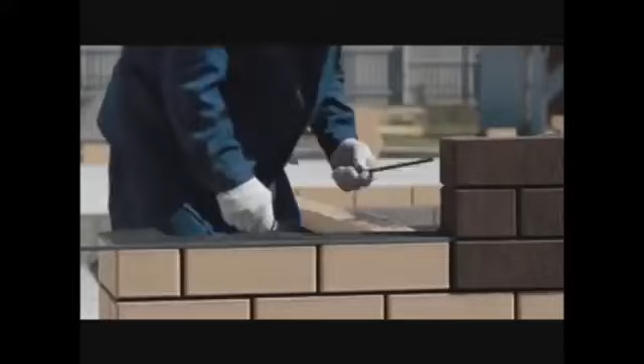In this presentation, we're going to be discussing the history of OSHA as well as the history of workplace accidents. We'll also be discussing the benefits of implementing an appropriate safety program. We'll go through the painful statistics involved in the construction industry and the most cited violations by OSHA inspectors. So, without further ado, let's get started.

In response to dangerous working conditions across the nation, and as a culmination of decades of reform, the bipartisan Williams-Steiger Occupational Safety and Health Act of 1970 was signed into law by President Richard M. Nixon. This law led to multiple organizations, including, of course, OSHA, but it also established the National Institute of Occupational Safety and Health, or NIOSH, and the Independent Occupational Safety and Health Review Commission.

The Occupational Safety and Health Act of 1970 was passed to prevent workers from being killed and seriously injured in the workplace. The law requires employers to provide their employees with working conditions that are free of hazards and known dangers.

OSHA establishes and enforces protective workplace safety and health standards. It was officially enacted on April 28, 1971. OSHA also provides information, training, and assistance to workers and employers. Workers may file a complaint to have OSHA inspect their workplace if they believe their employer is not following OSHA standards, or that they believe their workplace contains serious hazardous conditions.

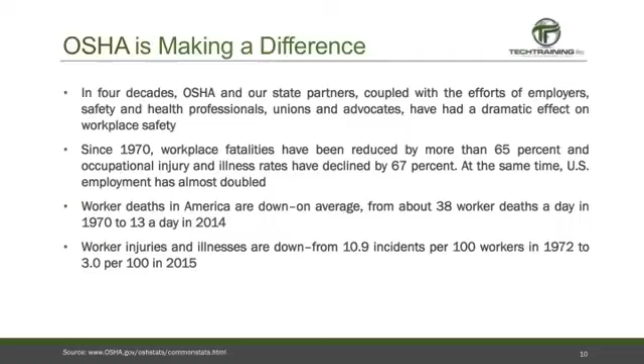Worker deaths in America are down on average from about 38 workers per day in 1970 to 13 per day in the year 2014, and worker injury and illness rates are down from 10.9 incidents per 100 workers in 1972 to 3 per 100 in the year 2015. These numbers are positive, but they're nothing to brag about. One death, one injury, one illness is far too many.

So who is covered by OSHA? Most employees in the United States come under OSHA's jurisdiction. OSHA covers private sector employees and employees in all 50 states and the District of Columbia, and other U.S. jurisdiction territories, directly through the federal OSHA program or through an OSHA-approved state program. State-run health and safety programs must be at least as effective as the federal OSHA program to qualify.

Employees who work for state and local governments are not covered by federal OSHA, but do have Occupational Safety and Health Act protection if they work in a state that has an OSHA-approved state program. Four additional states and one U.S. territory have OSHA-approved programs that cover public sector employees only. This includes Connecticut, Illinois, New Jersey, New York, and the Virgin Islands. Private sector workers in these 4 states and the Virgin Islands are covered by federal OSHA.

Federal agencies must have a safety and health program that meets the same standards as private employers. Although OSHA does not fine federal agencies, it does monitor federal agencies and responds to workers' complaints. The United States Postal Service is covered by OSHA. And now is a good time to mention the General Duty Clause. The General Duty Clause is written into the Occupational Safety and Health Act.

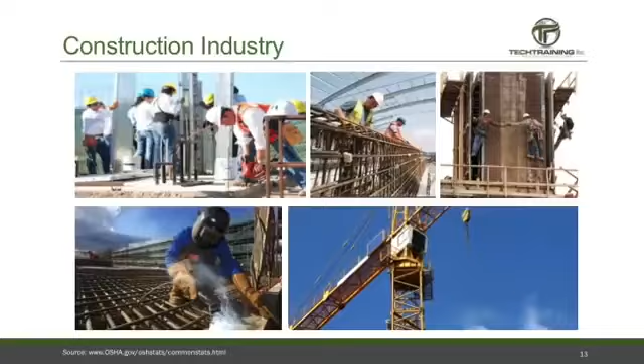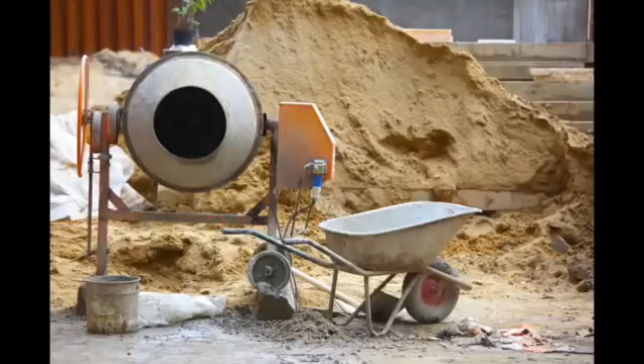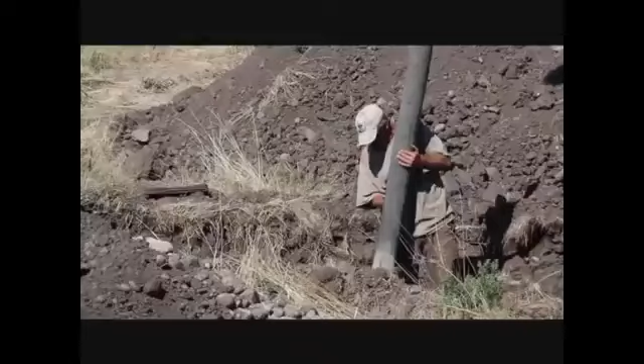And now, with this background, let's move on and talk specifically about the construction industry. Construction is a high-hazard industry that comprises a wide range of activities. It may involve demolition, alterations, renovations, and repair. Most people in this industry are in it because they have a passion for it. They're professionals and understand the hazards they face every day. Many of those hazards they can see - the potential for falls, unguarded equipment, or being struck by heavy construction equipment. Unfortunately, many hazards are not visible, such as silica dust or asbestos. The information and resources provided in this presentation are hopefully going to assist those in this industry, whether workers or employers, to identify, reduce, and hopefully eliminate construction-related hazards.

And there is no better place to start than with the construction industry's Fatal Four. Of the 4,386 worker fatalities in private industry in calendar year 2014, 899, or 20.5%, were in construction. The Fatal Four were responsible for more than half, or 60.6%, of construction worker deaths in calendar year 2014. And number one on the Fatal Four list, falls.

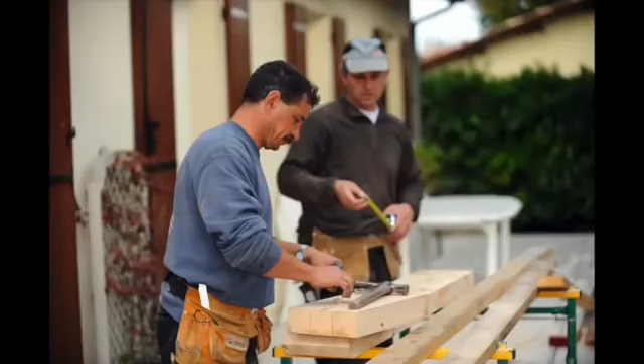359 of the 899 total deaths in construction in 2014 were caused by falls. That's 359 of our fellow workers who perished from this one hazard. Next up, electrocutions - 74 people killed. After that, struck by an object, 73 people. And last, caught in between, 39 fellow workers killed by this hazard. Just imagine if we could eliminate these 4 accidents - that would be 545 people returning home to their families at the end of every day, every year.

So now let's review what OSHA has found to be 2015's top 10 most frequently cited violations. Not surprisingly, number 1 is fall protection, obviously directly related to the Fatal Four. The C at the end of fall protection represents that this is a specific construction standard. Number 2, hazard communication - getting the message out. A big problem on the construction site and in the construction industry.

Number 3, also a construction standard, scaffolding. Number 4, respiratory protection - this is especially important when we're talking about silica dust. Respiratory protection protects you from unseen hazards. Number 5, lockout, tagout. Number 6, powered industrial trucks, obviously associated with being struck by, another one of the Fatal Four. Number 7, ladders, a construction standard. Number 8, electrical wiring. Number 9, machine guarding. And number 10, electrical - here we're talking about general electrical requirements.

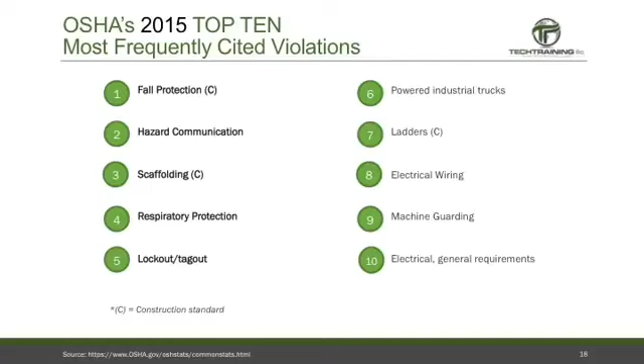Now we've already discussed that OSHA is the law, but let's take a look at the breakdown of these violations. Let's start with number 10, electrical, general requirements. This is OSHA standard 1910.303. Total violations for fiscal year 2015 was 2,181. Some of the top sections cited were installation and use of equipment, and, not surprisingly, the space around electrical equipment. This can be identified as a hazard on almost any job site you visit. The previous year, fiscal year 2014, the ranking for this violation was also number 10, with 2,427 cited violations.

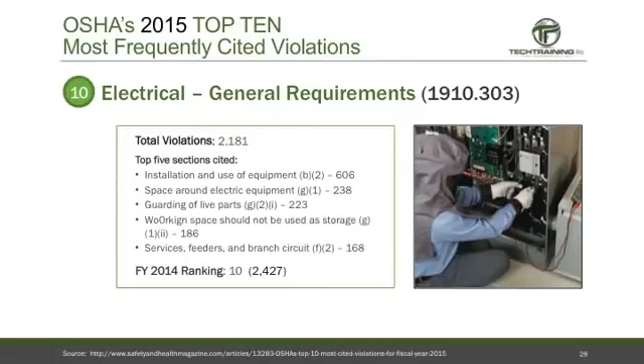Next up, number 9, machine guarding, OSHA standard 1910.212. Total violations for 2015 was 2,540. Not surprisingly, one of the top violations was types of guarding. It is highly recommended that you stick with manufacturer recommended guarding. If you question that guarding, you can always ask the manufacturer if this guarding is OSHA approved. If it is, then stick with that guarding and you can avoid this violation. This is the same ranking as 2014, number 9, with slightly more violations in 2015 than 2014, as 2014 had 2,520 violations.

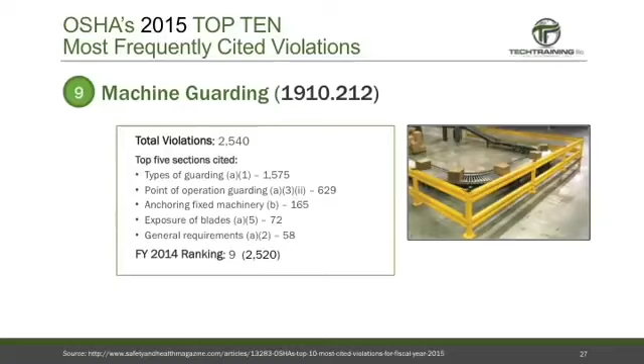Number 8, electrical again - this is wiring methods, 1910.305. Total violations for the year 2015 was 2,624. Of the top cited violations, use of flexible cords and cables - this is category G1 4A - had 447 violations. This one is becoming more and more common as people are using incorrect types of cords and cables. Be sure to verify that you're using the correct cable. In fiscal year 2014, its ranking was also number 8, but it had 2,907 violations, so 2015 saw a decrease of almost 300 violations, an overall improvement in the year 2015.

Number 7, ladders. OSHA standard 1926.1053. Total violations for 2015, 2,732. The number 1 cited violation in this category is requirements for accessing upper landing surfaces. This is a short climb, and what people do is grab a pallet or a plank and use it as their ladder. This was cited 1,866 times. The 2014 ranking for this category was number 7, so no change, but again a slight decrease - in 2014 there were 2,967 violations, compared to 2,732 in 2015.

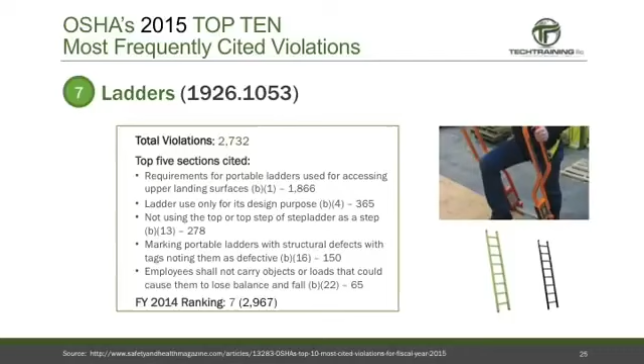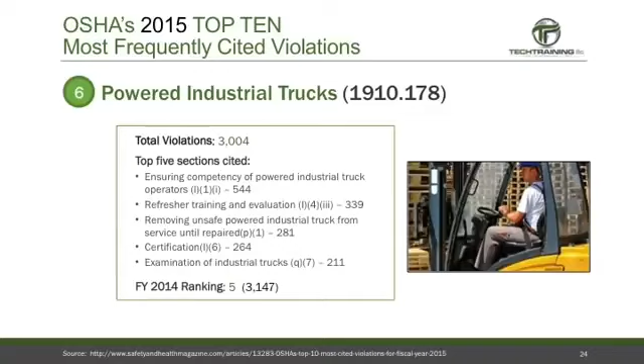Number 6, powered industrial trucks, 1910.178. Total violations, 3,004. Over 3,000 violations, and the number 1 violation is ensuring competency of the powered industrial truck operator. One of the fatal 4 was struck-by, and this violation was cited 544 times - incompetent powered industrial truck operators cited in 2015. That's a scary number considering the fatal 4. The 2014 ranking was number 5, so it's dropped back a bit, a positive sign, and the number of violations dropped from 3,147 in 2014. But these are directly related to the fatal 4 and have to be corrected.

Next, lockout tagout, 1910.147. This was number 5 on the 2015 list. This standard outlines minimum performance requirements for the control of hazardous energy during servicing and maintenance of machines and equipment. Total violations for 2015, 3,308. This is an increase from 2014, where there were 3,117 violations. Furthermore, this violation has moved up in the rankings - number 6 in 2014, moving in the wrong direction to number 5 for 2015. Next is number 4, respiratory protection, standard 1910.134.

This standard directs employers on how to establish and maintain a respiratory protection program. It lists requirements for program administration, worksite specific procedures, respirator selection, employee training, fit testing, medical evaluation, and respirator use. It also covers maintenance and repair of respirators. OSHA cited this standard in 2015 3,626 times. This again is a slight improvement over 2014, where it was cited 3,843 times.

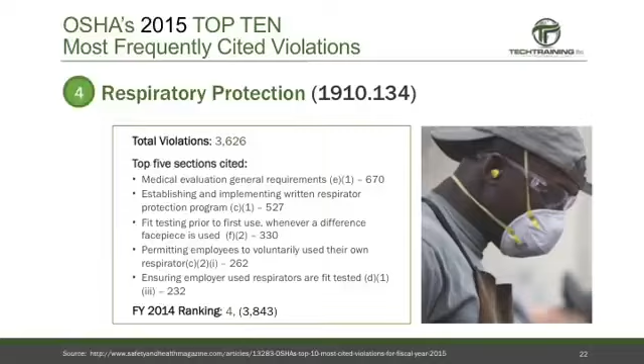Number 3, scaffolding, standard 1926.451. Total violations in 2015, 4,681. Take a look at the number 1 issue in this sector - it was employee fall protection, cited the most times at 788. And again, I want to remind you the number 1 in the fatal 4 was in fact falls. This is a slight improvement over 2014, where the ranking still remained number 3, but was cited 4,968 times.

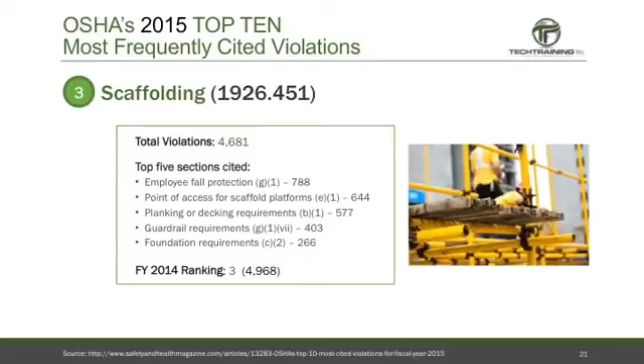Number 2 is hazard communications, 1910.1200. This standard addresses chemical hazards produced in the workplace and imported into the workplace. It also governs the communication of those hazards to workers. This particular violation was cited 5,681 times in 2015. Its ranking in 2014 was number 2, when it was cited 6,148 times - again a slight improvement over 2014.

And number one cited in 2015 again was Fall Protection, 1926.501. This is also the number one in the Fatal 4, falls. This standard outlines when fall protection is required, which systems are appropriate for given situations. It also covers the proper construction and installation of the safety systems, and the proper supervision of employees to prevent falls. It is designed to protect employees on walking or working surfaces, horizontal or vertical, with an unprotected side or edge higher than just 6 feet.

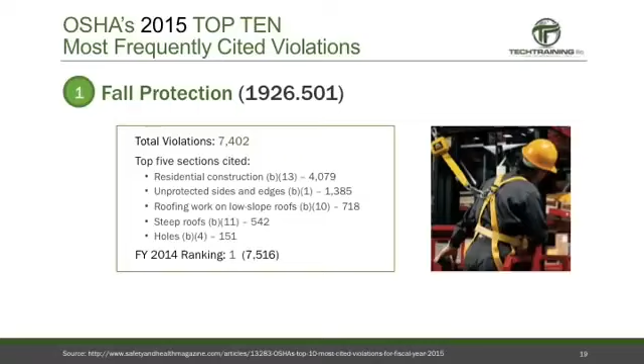According to OSHA's top 10 most frequently cited violations of 2015, this was number one, ranking fall protection, cited 7,402 times, and unfortunately it was also number one in 2014, being cited 7,516 times.

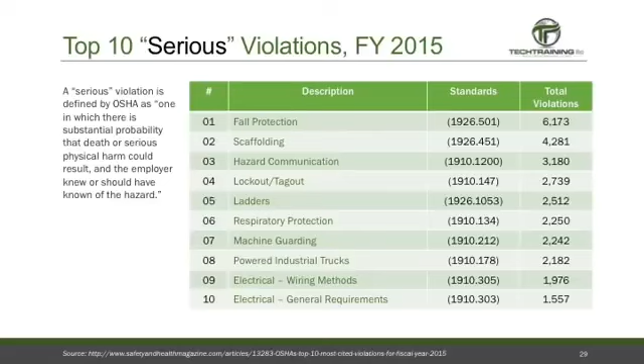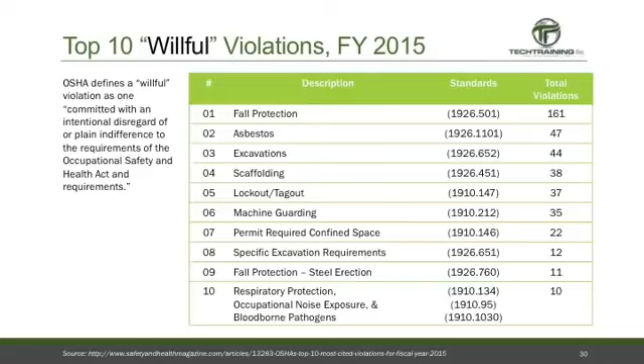Now, to show that these were not simply minor incidents, check out these statistics. Here is a list of what was considered a serious violation of the top 10. A serious violation is defined by OSHA as one in which there is an imminent substantial probability that death or serious physical harm could result, and the employer knew or should have known of that hazard. If you take a look, number one again is obviously falls, and 6,173 of those violations were considered serious. And check out these numbers - these are willful violations. Willful violations are those committed with an intentional disregard or plain indifference to the requirements of the OSHA standards and requirements.

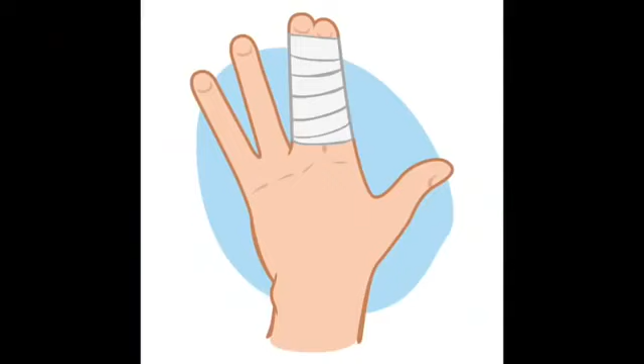Now here's a sad reality. Hazards exist on every construction site in many different forms: sharp edges, falling objects, flying sparks, chemicals, noise, and a host of other potentially dangerous situations.

OSHA requires that employers protect their employees from workplace hazards that can cause injury. Controlling a hazard at its source is the best way to protect employees. Depending upon the situation and workplace conditions, OSHA recommends the use of engineering or work practice controls to manage or eliminate hazards to the greatest extent possible.

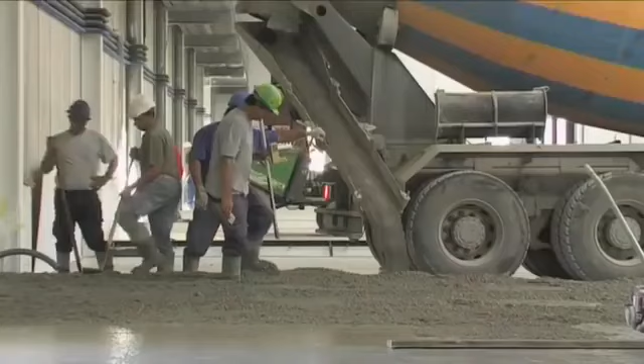For example, building a barrier between the hazard and the employee is an engineering control. Changing the way employees perform their work is a work practice control. When engineering, work practice, and administrative controls are not feasible or do not provide sufficient protection, employers must provide employees with personal protective equipment, or PPE.

Personal protective equipment is equipment worn to minimize exposure to a variety of hazards. These injuries and illnesses may result from coming in contact with chemicals, biologics, physical, electrical, mechanical, or other workplace hazards. PPE may include items such as gloves, safety glasses, safety shoes, earplugs or earmuffs, hard hats, respirators, coveralls, vests, and in some cases, full body suits.

So what can be done to help ensure the proper use of personal protective equipment? Well, all PPE should be of safe design and construction, and should be maintained in a clean and reliable fashion. It should fit well and be comfortable to wear. This will encourage workers to use it. If PPE does not fit properly, it can make the difference between being safely covered or dangerously exposed.

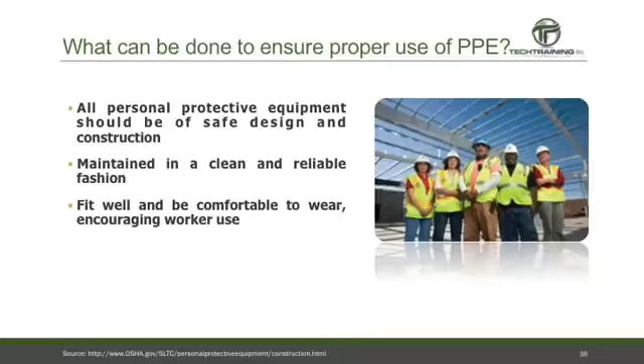When is it necessary to wear personal protective equipment? What kind of PPE is required? The limitations of the PPE, the proper care, maintenance, and the useful life, as well as the disposal of the personal protective equipment.

Now, whether you are an employee or an employer, you should be interested in some of the general safety and health provisions involved with personal protective equipment. This falls under 1926.28. The employer is responsible for requiring the wearing of all appropriate PPE in operations where there is exposure to hazardous conditions.

1926.28(b): Regulations governing the use, selection, and maintenance of personal protective equipment and life-saving equipment are described under Subpart E of this section. 1926.95(a): Protective equipment, including PPE for eyes, face, head, extremities, etc., shall be provided, used, and maintained in a sanitary and reliable condition.

Now, we realize some of these regulations are extremely dull, but this next one is important, as we've seen many arguments erupt between workers and supervisors on various construction sites. It's related to employee-owned personal protective equipment, under OSHA 1926.95(b). It states: where employees provide their own PPE, the employer shall be responsible to assure its adequacy, including proper maintenance and sanitation of such equipment.

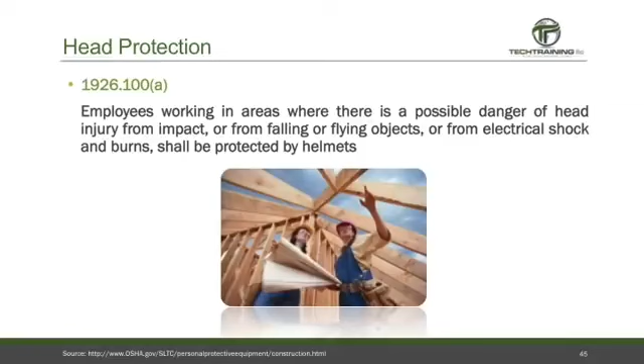And those helmets must meet some specifications, which fall under 1926.100(b): Helmets for protection of employees against impact and penetration of falling or flying objects shall meet the specifications contained in American National Standards Institute ANSI Z89.1-1969, Safety Requirements for Industrial Head Protection.

And if you are in an occupation which exposes you to high voltage electrical shock, the specification is slightly different. Here, the head protection must meet specifications contained in American National Standards Institute Z89.2-1971.

Next up is hearing protection.

1926.101 hearing protection. Wherever it is not feasible to reduce the noise levels or duration of exposure to those specified in Table D2, permissible noise exposures in 1926.52, ear protection devices shall be provided and used.

When ear protection devices are inserted into the ear, they shall be fitted or determined individually by competent persons. And this is a good time to mention that stuffing cotton into someone's ears is not acceptable hearing protection.

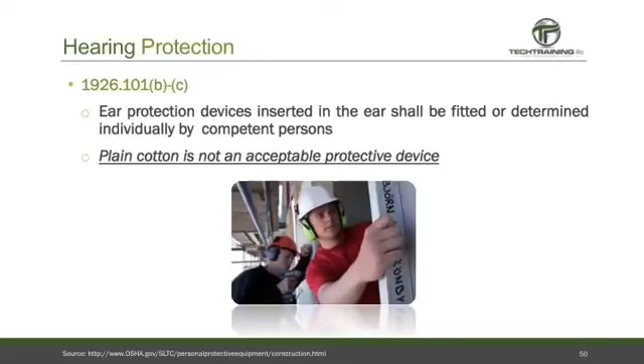Eye and face protection, 1926.102. Employees shall be provided with eye and face protection equipment when machines or operations present potential eye or face injuries from physical, chemical, or radiation agents.

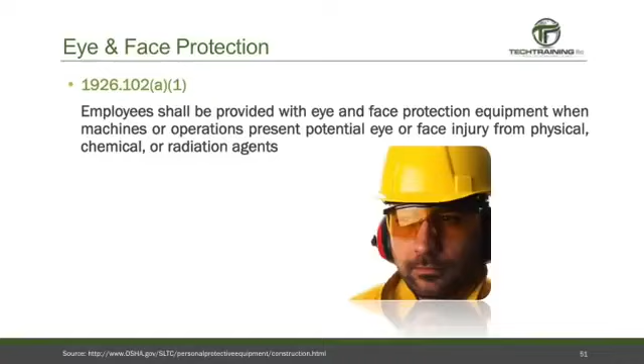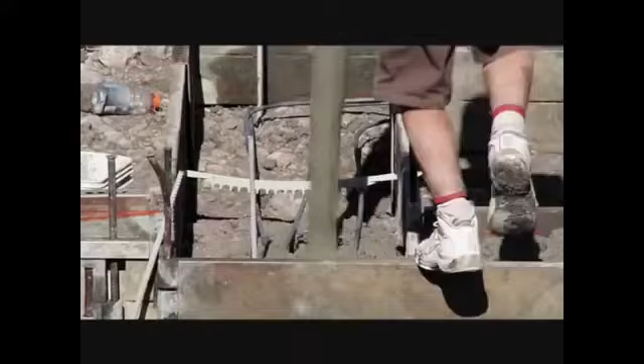Safety glasses or face shields are worn any time that work operations can cause foreign objects to get into the eye. For example, during welding, cutting, grinding, nailing, or when working with concrete or harmful chemicals.

Eye and face protection should also be worn whenever there's going to be exposure to any electrical hazards, including working on energized electrical systems. Eye and face protection should be selected based on the anticipated hazards.

Eye and face protection equipment required by 1926.102 shall meet the requirements specified in the American National Standards Institute Z87.1-1968, Practice for Occupational and Educational Eye and Face Protection.

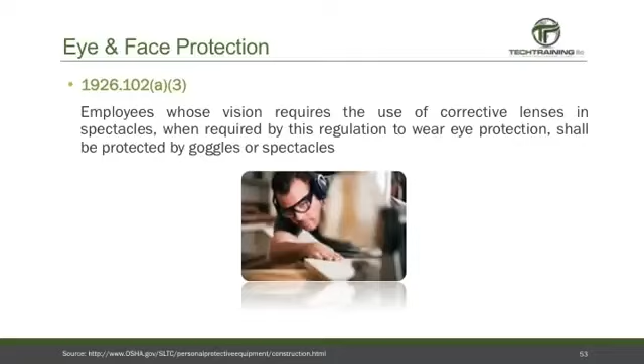Employees whose vision requires the use of corrective lenses in spectacles, when required by this regulation to wear eye protection, shall be protected by goggles or spectacles.

When wearing goggles or spectacles, they must meet the following specifications. The spectacles must have protective lenses which provide the optical correction. The goggles worn with the corrective spectacles must be worn without disturbing or adjusting the spectacles. And lastly, if the goggles are going to have corrective lenses, the corrective lenses must be incorporated and mounted behind the protective lenses.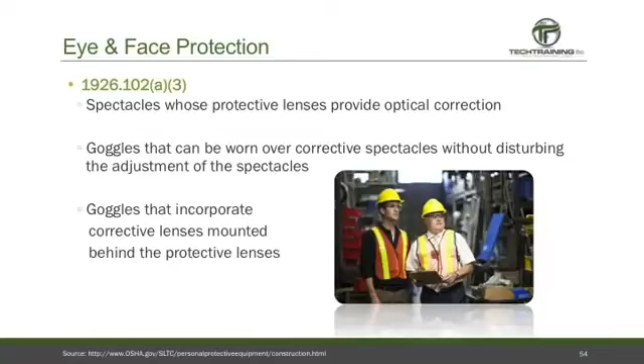Respiratory disease is the silent killer of the construction industry, and therefore respiratory protection is taken very seriously. Respiratory protection falls under OSHA 1926.103, but is identical to the Code of Federal Regulations 1910.134. When respiratory protection is required, it must come with a written program, medical evaluations, fit testing, selection and use of respirator, maintenance and care, training, program evaluation, and record keeping.

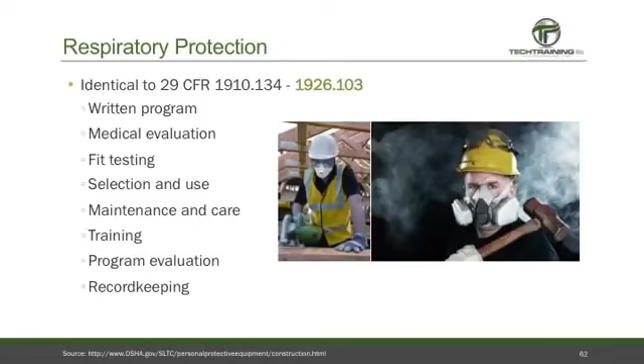Next is 1926.104, safety belts, lifelines, and lanyards. Lifelines, safety belts, and lanyards shall be used only for employee safeguarding.

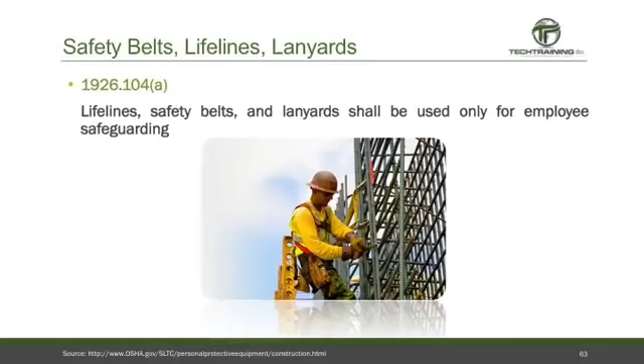Lifelines shall be secured above the point of operation to an anchorage or structural member capable of supporting a minimum dead weight load of 5,400 pounds.

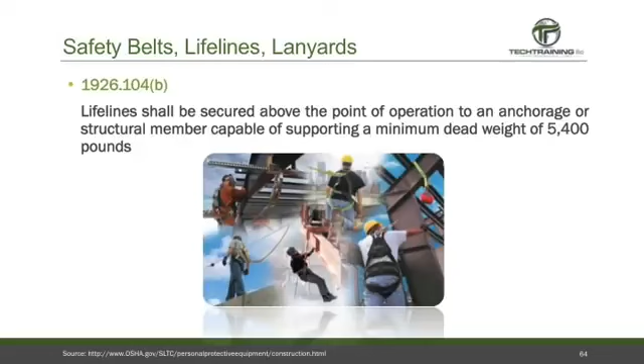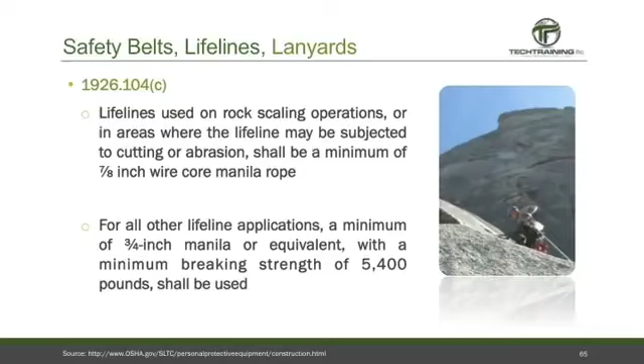Lifelines used on rock scaling operations or in areas where the lifeline may be subject to abrasion or cutting shall be a minimum of 7/8 of an inch wire core manila rope. For all other lifeline applications, a minimum of 3/4 of an inch manila or equivalent with a minimum breaking strength of 5,400 pounds shall be used.

Safety belt lanyards shall be a minimum of 1/2 inch nylon or equivalent with a maximum length to provide for a fall of no greater than 6 feet. Furthermore, the rope shall have a nominal breaking strength of 5,400 pounds.

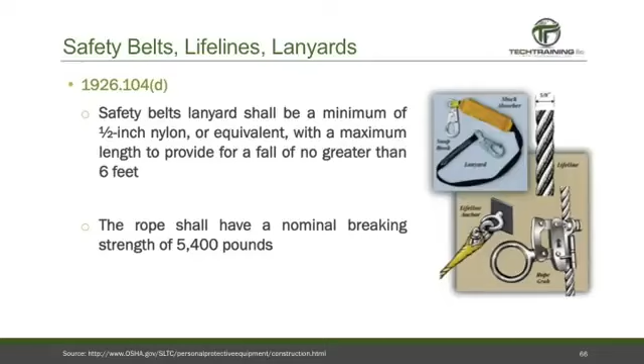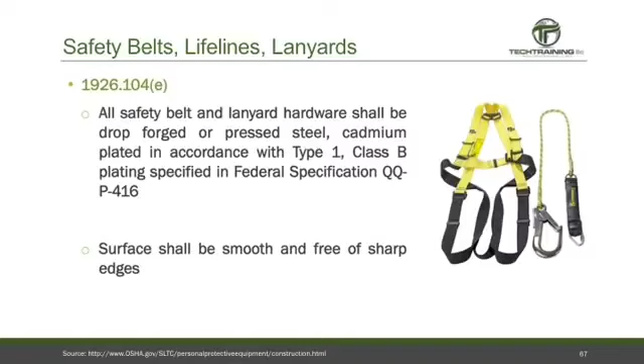All safety belt and lanyard hardware shall be drop forged or pressed steel in accordance with Type 1 Class B plating, specified in the Federal Specifications QQ-P-416. All safety belt and lanyard hardware, except rivets, shall be capable of withstanding a tensile loading of 4,000 pounds without cracking, breaking, or taking a permanent deformation.

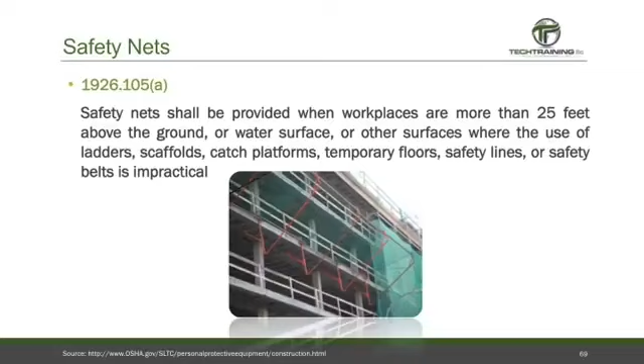Safety nets shall be provided when workplaces are more than 25 feet above the ground or water surfaces, or other surfaces where the use of scaffolds, catch platforms, temporary floors, safety lines, or safety belts are simply impractical.

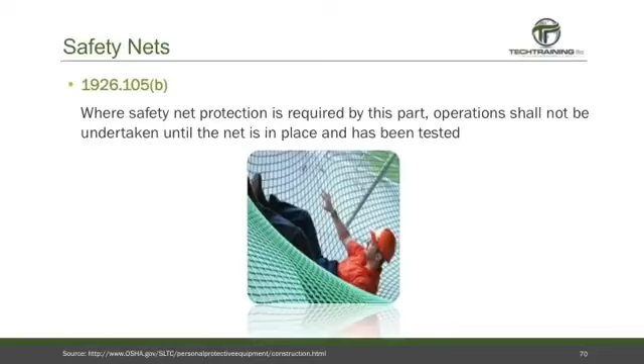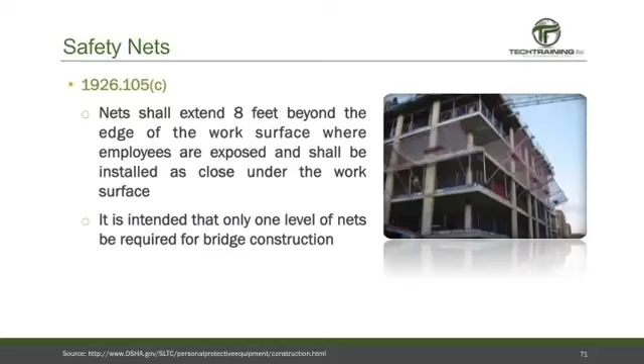When safety nets are required, operations shall not be undertaken until the net is in place and has been tested. Nets shall extend 8 feet beyond the edge of the working surface, where employees are exposed, and shall be installed as close under the work surface as possible. It is intended that only one level of nets be required for bridge construction.

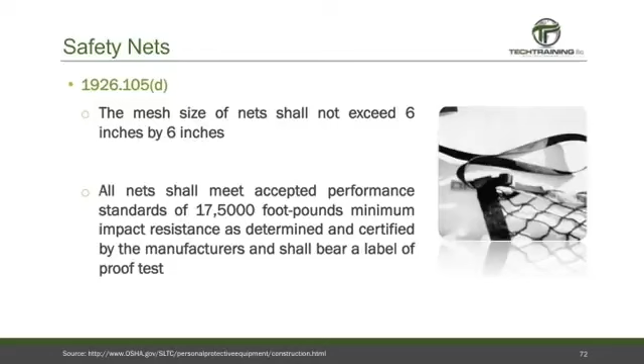All nets shall meet a performance standard of 17,500 foot-pounds minimum impact resistance as determined and certified by the manufacturers, and shall bear a label of proof test. Forged steel safety hooks and shackles shall be used to fasten the net to its supports. Also, connections between net panels shall develop the full strength of the net.

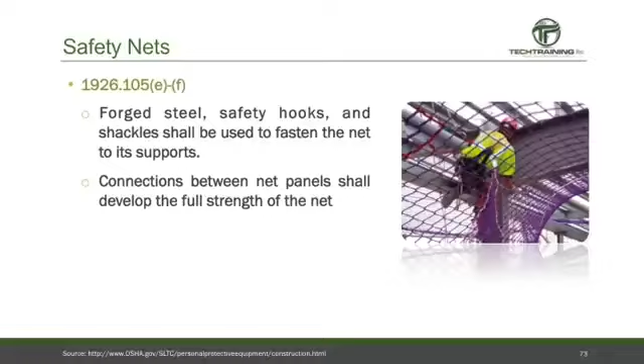Working over or near the water is 1926.106, and it states that life jackets or buoyant work vests must be approved by the United States Coast Guard. Also, prior to and after any use, the buoyant work vests or the life preservers shall be inspected for defects.

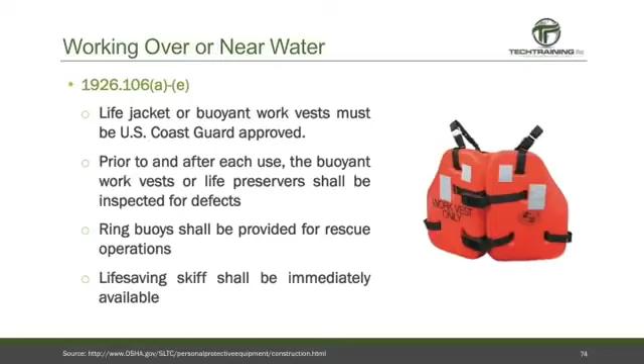Ring buoys shall be provided for rescue, and also a life-saving skiff shall be immediately available.

Construction fatalities rose to 874 in 2014, up from 828 in 2013. The number of fatal injuries in construction in 2014 was the highest reported total since 2008. The fatal injury rate for workers in the private construction industry was 9.5 per 100,000 full-time equivalent workers in 2014, and 9.7 per 100,000 in 2013. Heavy and civil engineering construction recorded a series low of 138 fatal injuries in 2014, down from 165 in 2013.

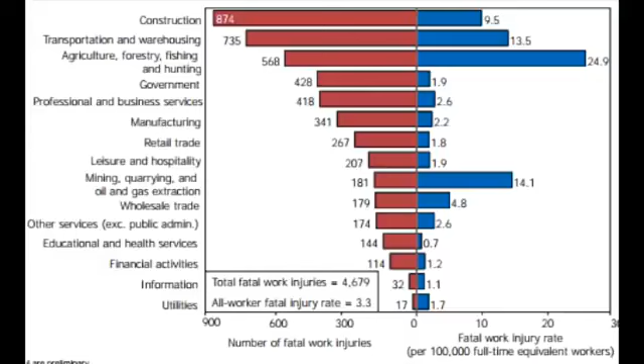There is no question that starting a job site safety program is difficult. There are those who believe it is all about compliance. There are those who believe it's all about saving money. There are even workers who believe that safety programs are designed to simply get rid of people on the job site that the supervisor doesn't like. In some very rare cases, this may be true.

But let's take a look at why you should be interested in a job site safety program. And let's start with the difference between an accident and an incident.

Accidents are unexpected, unplanned, and uncontrollable. Now, many people say this simply isn't true. Accidents are controllable. They are not controllable. They are preventable, but they are not controllable. Once they begin, they take on a life of their own. Accidents can cause physical injury, property damage, and equipment loss.

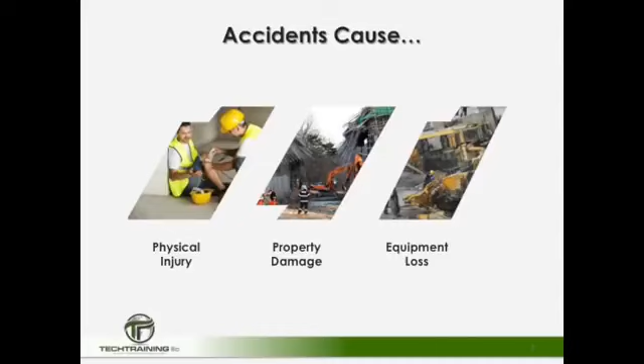Now, an incident can come close to causing physical injury, property damage, or equipment loss. And many people say, well, isn't that the same thing? Well, it is, except incidents go unreported, and incidents are the key to preventing accidents. If we address incidents before they cause loss or injury, we're going to take a big step forward in preventing accidents.

The interaction between workers, equipment, management, and machines are complex enough. But even more complexity is added in when all of these things come together to form the workplace. Those in the construction industry may be used to this type of complexity, but now add in the unexpected problems that you may be bringing from home. Perhaps you're preoccupied with a sick family member, or maybe even an old friend. And what about peer pressure on the job site? Or perhaps you got an unexpected bill. When all of these things come together on the job site, we have an accident.

So what can be done? We've already discussed the history of OSHA, but what about some of the other benefits? First, the company is going to receive lower industrial insurance costs. The more you comply with OSHA, the fewer compliance inspections there are. A safer job site means reduced litigation, reduced legal fees, and less settlements. And finally, there are going to be significantly lower indirect costs for the company, which means more profit and more money for the workers.

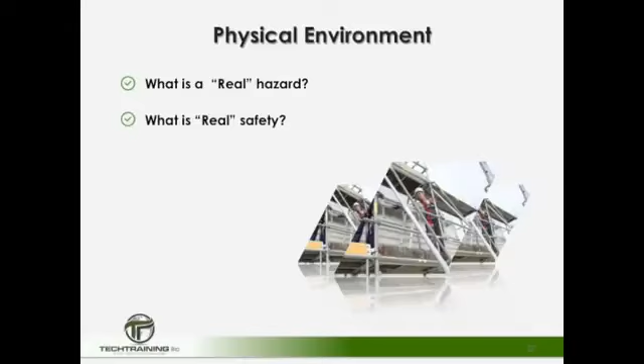In the section on physical environment, we're going to be talking about how to identify actual hazards. On the construction site, there are many potential hazards. Some are visible and some are not visible. But the question becomes, what is a real hazard and what is a perceived hazard? Also, what is true safety and what is perceived as safety? And lastly, we have to ask, can something so little cause any serious injury? Well, we're going to find out.

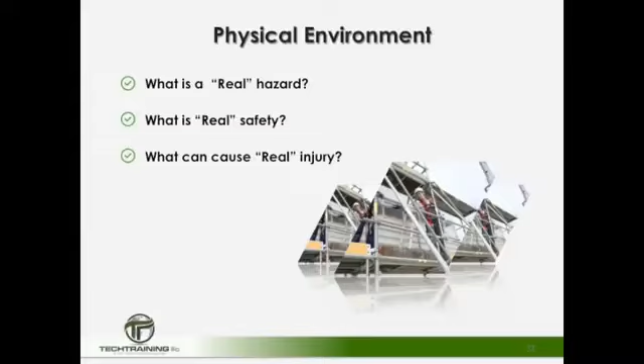Next, we're going to take a look at the social environment of the construction site and the attitudes towards safety. We're going to ask the following questions: Who is responsible for safety? Why is there so much negativity about safety? And in reality, isn't safety just all about compliance?

And lastly, we're going to take a look at the systems that we use on the construction site. And we're going to try to inject two things immediately into the job site: peer keeping and reporting.

Now, earlier in this presentation, we discussed the statistics of injuries in the construction industry. And those statistics are not pretty. Construction continues to be number one or number two for deaths in the workplace. With this in mind, let's move forward with one focus and one clearly stated goal: that no one ever gets hurt.

Just a few minutes ago, we said that starting a safety program was difficult because there's those who believe it's all about compliance, others who believe it's all about money, and workers who believe that safety is nothing more than a management tool. But this simple statement removes all politics, removes all company grievances and worker grievances, and focuses on one single goal: that no one ever gets hurt.

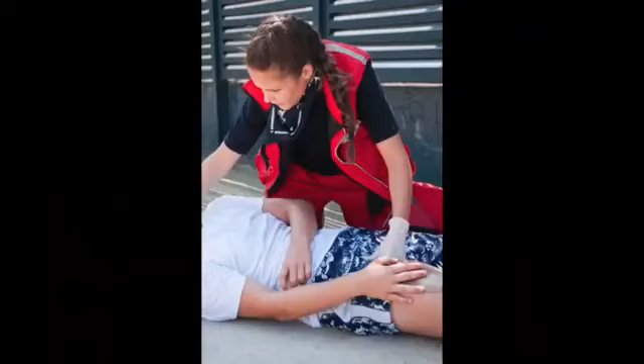All too often, an accident occurs on the construction site, and it's reported, recorded, and hopefully corrected. But then most of us move on with our lives. For the injured person and their family, they have to continue to live with that injury every day. In many cases, they have to become overnight attorneys just to find out what benefits they're entitled to, or learn new skills and new training just to continue on with their lives.

Now, to reach this goal, we must build, for lack of a better expression, a solid foundation. The mere fact that you're watching this video now some 45 minutes in suggests that you do want to make a change on the job site.

The reality is that every work site and every worker is slightly different, which makes many hazards unique. Therefore, what we hope to accomplish here is to give you the tools that are going to develop a safe environment, gain cooperation, and encourage the sharing of ideas and a call for new ideas. We hope to encourage safe behavior on every job site, and hopefully you'll be able to build and establish safety systems that work for you and your coworkers.

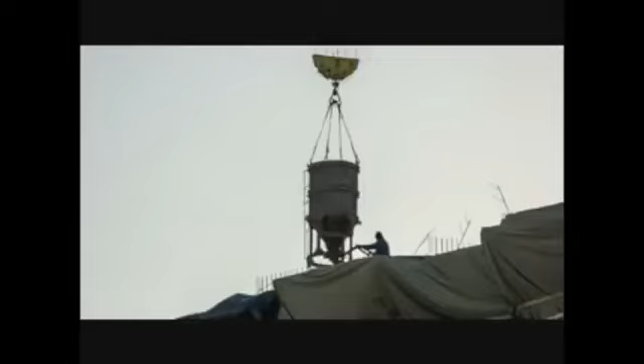So let's go ahead and get started with helping ourselves and others. We're going to begin by focusing on the physical environment in which we work. As we said, every construction site is unique, which means that every hazard is unique as well. So here we're going to be focusing on three main areas: being aware of hazardous environments, avoiding hazardous activities, and finally wearing our personal protective equipment.

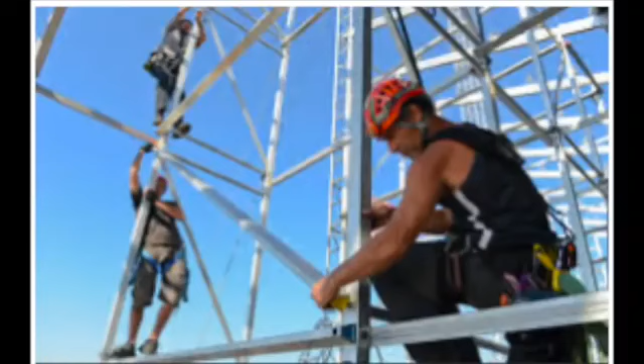But this does not exonerate the workers. How many problems do you see here? Or here? Or here? Well, we're going to revisit our three buddies here as well as the job trailer in a few minutes. But for now, what we'd like to do is show you how a simple event can cause a catastrophic accident.

This is what we refer to as the pyramid of hazard identification. And sometimes to identify a hazard, we must use a little imagination. So let's assume that we have a little bit of soap on the floor. Is this a hazard? Well, of course.

But let's imagine what exactly could possibly happen from a little soap on the floor. Could someone slip on the soap and then not report it or not clean it up themselves? If so, this is an incident. Remember, an incident is close to an accident, but it goes unreported and uncorrected. So could this happen? Absolutely.

Now, since the soap wasn't cleaned up, could a person slip on the soap and hurt their back? And it's just a minor injury, so they go back to work and continue throughout the day, and eventually the pain goes away because it was a minor fall. But could somebody slip and break an arm? Absolutely. And now we have a lost time accident with an employee in severe pain, who is going to have to make adjustments in their life to compensate for that broken arm.

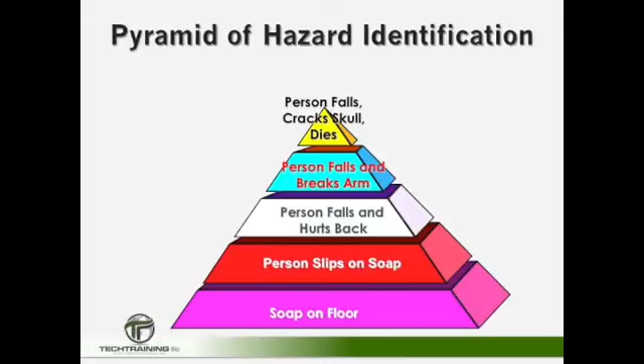All because the soap wasn't cleaned up. And even worse, could that little bit of soap on the floor result in a death? Unfortunately, the answer is yes. And all of this could have been avoided had someone just taken a moment to clean up the soap. If they didn't have the available equipment to clean up the soap, they could have marked off the area so that nobody else would slip on it until they could notify the proper people to come clean it up.

Now, if a little soap on the floor can cause such injury, just imagine how many things we probably pass by on the job site every day that could be corrected.

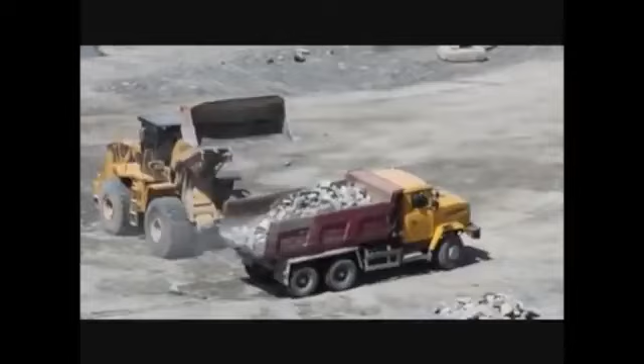Now that we have a basic understanding of hazard awareness, let's take a look at avoiding dangerous activities. Though it's easy to say avoid dangerous activities on the job site, it's much easier said than done. We have dangerous activities going on around us every day on a regular basis. But there are precautions and steps that we can take to minimize the dangers and to protect ourselves and others.

Now, if what this gentleman needed to say to the welder was so important that it couldn't wait, he should have approached the welder from his visible side, waited until the welder acknowledged him, and let him know that it was safe to approach. The welder may actually take this opportunity to let the gentleman know that he's concerned about his safety, and that in the future, when he comes to approach, he should be sure to be wearing the proper PPE.

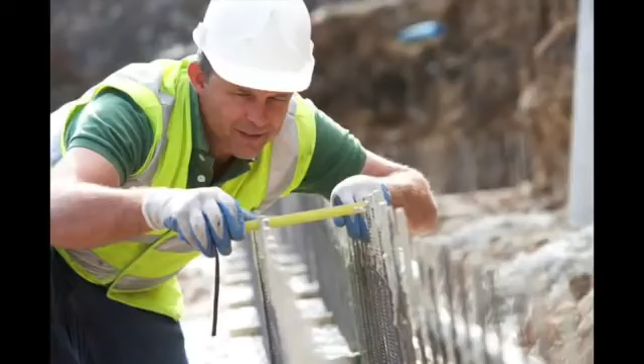Now, if you don't know the PPE requirements for a particular task, ask a supervisor. A good supervisor will know the PPE requirements for every task, and if they don't, they will at least know where to go to get the answer. So don't forget your personal protective equipment. At a minimum, every job site should be equipped with at least the basics: hard hats, vests, glasses, dust masks, hearing protection, and gloves.

Next, let's take a look at our attitudes towards safety, and let's begin with agreeing that safety is indeed everyone's responsibility. Remember our pyramid? Well, had the first person who saw that soap stopped and cleaned it up, we never would have moved up the pyramid.

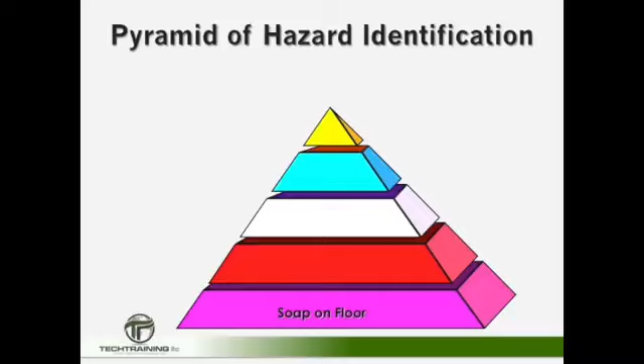Now granted, some people may not have realized how big of a hazard a little bit of soap can be, but there were others who thought, 'Not my job, why should I bother?' and moved on. This is a bad attitude. And where does that bad attitude come from?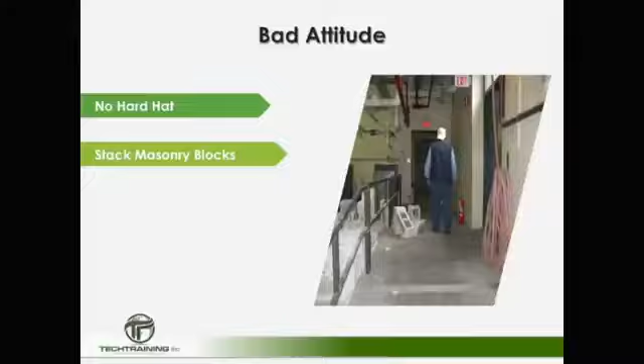Well, one obvious hazard here is that this gentleman is not wearing a hard hat. But there's also these masonry blocks that could be stacked, and that hose could be wrapped up more properly. Furthermore, the fire extinguisher isn't hung, and experience tells us that once an extinguisher comes down off the hook, it just moves further and further away from where it's supposed to be. So when a fire does occur, nobody can find the fire extinguisher.

And how long would it take to clean this up? How long would it take to have a safer work environment? 2 minutes? Maybe 3? The right attitude can produce a better, safer work environment.

Now, there are still other attitudinal issues that need to be addressed on the construction site. Did you ever meet this guy? The supervisor who uses safety as an opportunity to pass out pink slips to people he doesn't like? Or the worker who insists that management isn't taking safety seriously unless they install a $17 billion ventilation system into the porta-john? Or the supervisor who uses safety as an opportunity to tell everyone they're stupid? These kind of individuals create negative attitudes on the job site.

But, believe it or not, there's something that can be done. One of the most effective tools that can be implemented into any safety program is peer keeping. As the old saying goes, 2 heads are better than 1.

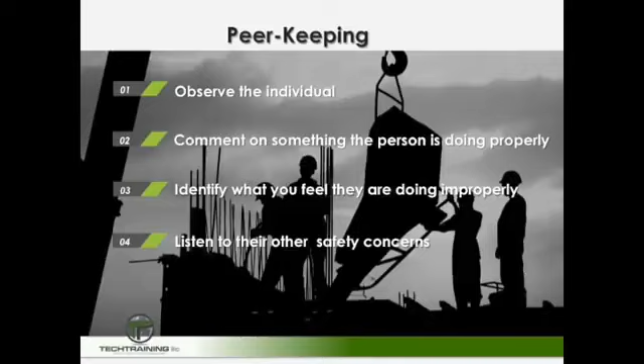Lastly, and probably most importantly, do not walk away if the person has other safety concerns. If they want to discuss another safety issue, you have an obligation to stay and listen to that issue. Again, if you walk away, they're going to feel your only interest is compliance and not safety.

So let's go ahead and give this a shot. Remember our buddy who was lugging all the wood? Well, after observing him for a moment, we can see that clearly he's struggling and clearly this is unsafe. So you might start off by saying, 'Hey, it's obvious you're a hard worker and you're a safe worker, you're wearing your hard hat. But is there a better way to lug this wood from point A to point B?'

If they say no, then offer a better way or offer to lend a hand. And lastly, if they want to discuss some other safety issue or even discuss this safety issue further, then stay and listen, offer recommendations or potential changes to make the job safer.

Next, remember our supervisor with the disastrous office? All of the hazards that we identified here? There was the poorly stored chemicals, the overloaded electrical outlets, and the tripping hazards. What could you do here using peer keeping? And remember, you're probably talking to the supervisor, perhaps even your supervisor.

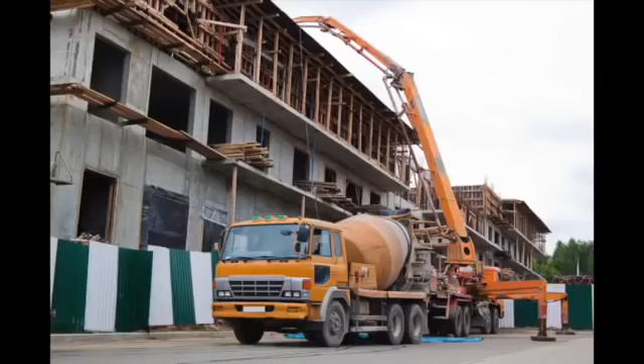Next, your safety system should always promote new ideas because the job site is also constantly changing. The conditions in which construction takes place change daily and in many cases change without predictability. Never squash an idea or crush somebody's thoughts. If you do, chances are you'll never get another new idea. And lastly, promote these ideas because you never know who might have one.

As part of your safety system, always discourage unsafe acts and unsafe behaviors. This lets everyone know on the job site that you're serious about safety, and they are more comfortable to discuss it and point out unsafe acts and conditions.

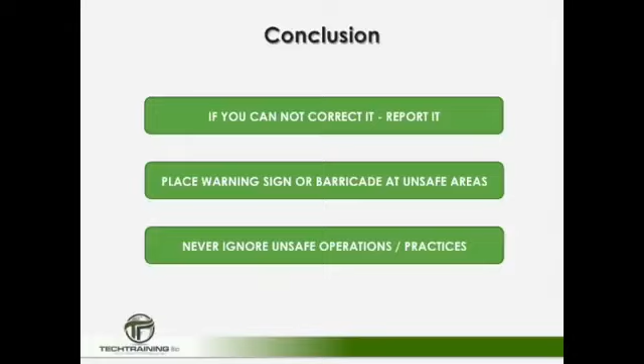In conclusion, remember, if you see a safety hazard and you cannot correct it, then you can report it. In the meantime, place a warning sign or some other type of barricade around the unsafe area. This lets everyone know that there's a potential hazard. And never ignore an unsafe act, behavior, or condition.

Ladies and gentlemen, a sad and unfortunate update. While making this video, the Bureau of Labor Statistics released their 2015 fatality rates in the construction industry. I personally hate referring to these people as rates, as statistics, or as numbers. Every one of them was a coworker, a friend, a mother or a father, a son or a daughter, a brother or a sister.

And the sad news is this, that in 2015, construction job site deaths rose to a 7-year high. Furthermore, the industry's fatality rate also rose, which means the number of workers per 100,000 increased as well as the overall number. This means that even if you wanted to look at these numbers statistically, we're doing more poorly today than we did in previous years.

The Bureau of Labor Statistics report, which was released on December 16, 2016, stated that construction deaths climbed 4% to 937, the most since 2008, when the industry recorded 975 fatalities. The Bureau of Labor Statistics also said that construction's 2015 fatality rate increased to 10.1 per 100,000 full-time construction workers, up from 9.8 in 2014.